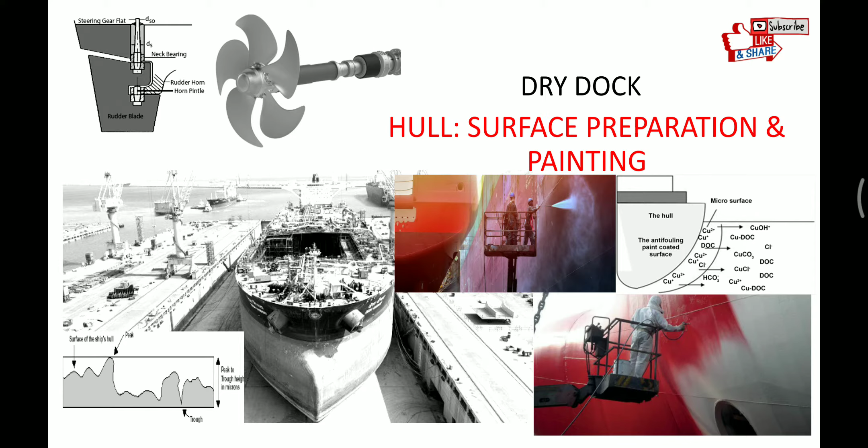So friends, till now we have discussed the whole dry docking process, how the ship is taken to the dock, the work carried out during dry docking, and how we have taken the ship out of dock. Now we will see one of the major jobs done during dry docking, that is surface preparation and hull painting. So let's see the process.

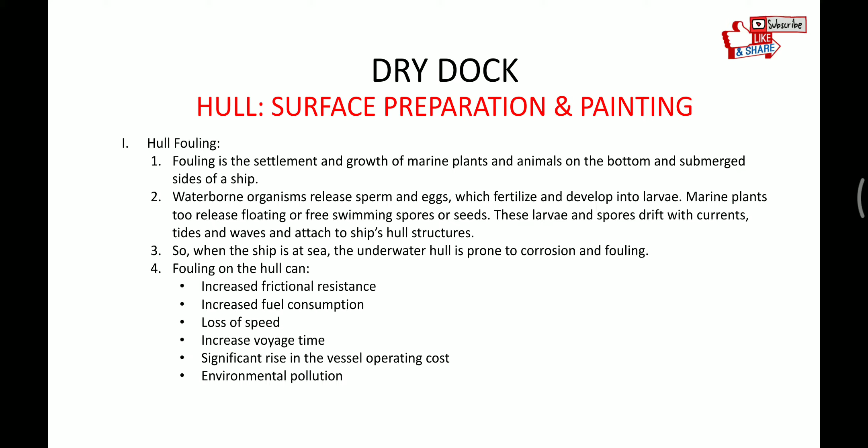When the ship is underwater, the underwater part of the hull gets fouled and corroded, so for that the hull has to be painted. If the hull is fouled, it increases friction resistance, increases fuel consumption, causes loss of speed, increase in voyage timing, significant rise in vessel operating cost, and environmental pollution.

So before the paint is applied, we have to prepare the surface. Surface preparation basically involves cleaning of the surface and drying — cleaning of surface from oil, grease, dirt, and chemicals, since these things prevent adhesion of coating.

Then water soluble materials like sodium chloride, which causes blistering of the paint. Then soluble ferrous salt, which in contact with steel and moisture initiates rusting of the steel. Then loose rust and mill scale. So we have to remove all these things from the surface before paint can be applied. Another important thing is the roughness of the surface should also be taken into consideration before applying paint.

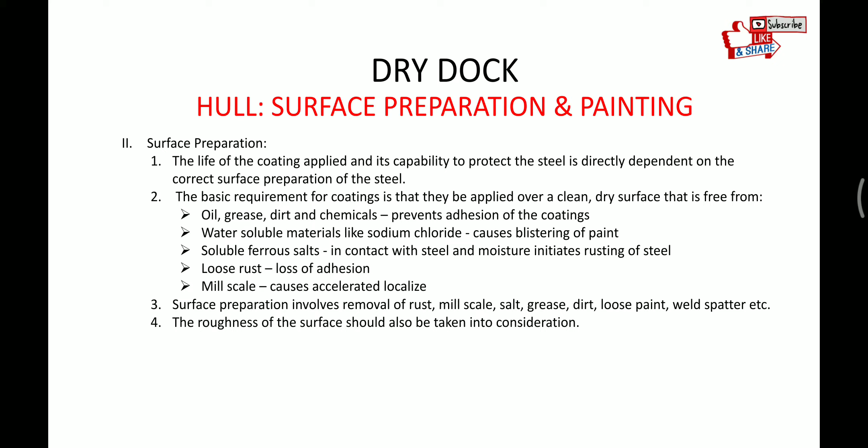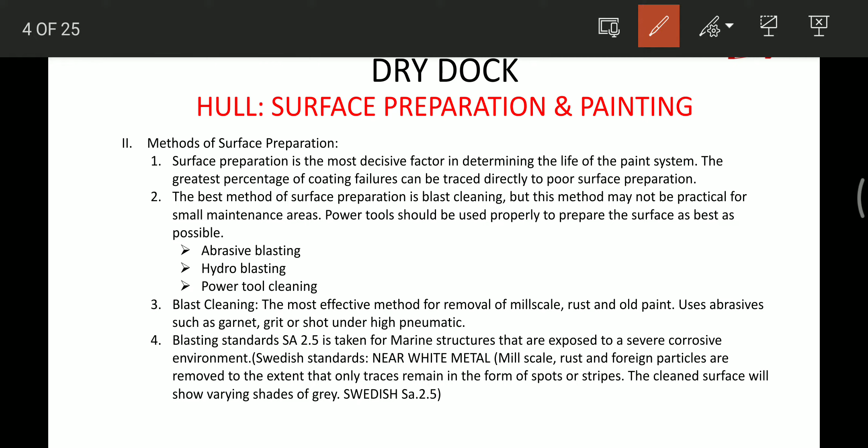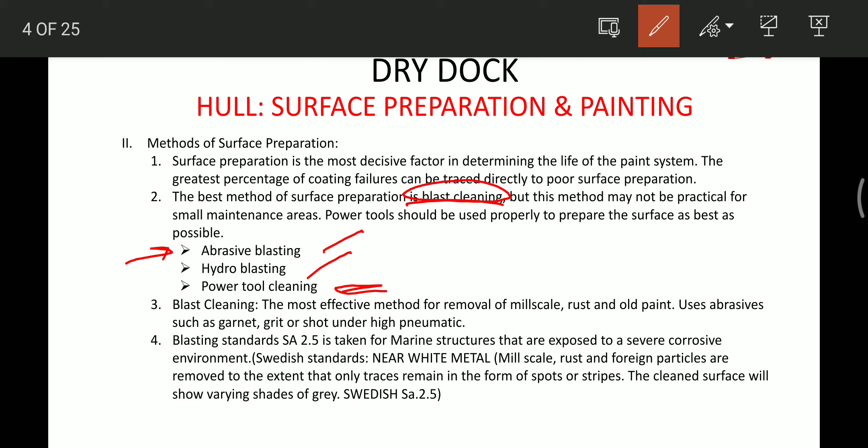So surface preparation can be done by using the blasting technique. Blast cleaning process is used for surface cleaning for large areas, while for smaller areas power tools are used. Surface cleaning by blasting can be of abrasive blasting or hydroblasting — let's see these one by one.

Blasting can be of different types, like sweep blasting, in which only a jet of abrasive is used. Its effectiveness depends on the nature and condition of the surface, the type and particle size of the abrasive, and the skill of the operator.

Whereas abrasive and slurry blasting, which is called wet blasting, uses water and abrasive. The advantage is that the hazards of dust and associated health problems are overcome, and this process can also remove salt.

The third type is hydroblasting or hydrojetting. This technique cleans the surface relying entirely on the energy of water, free of abrasive, striking the surface to achieve the cleaning effect. Here the pressure of water can go up to 25,000 psi, and the size of the nozzle is very important.

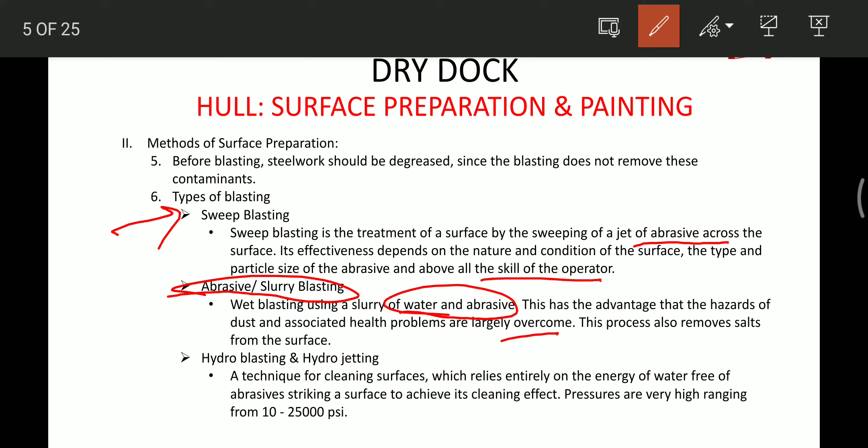For non-ferrous metals, sweep blasting can be used at low pressure.

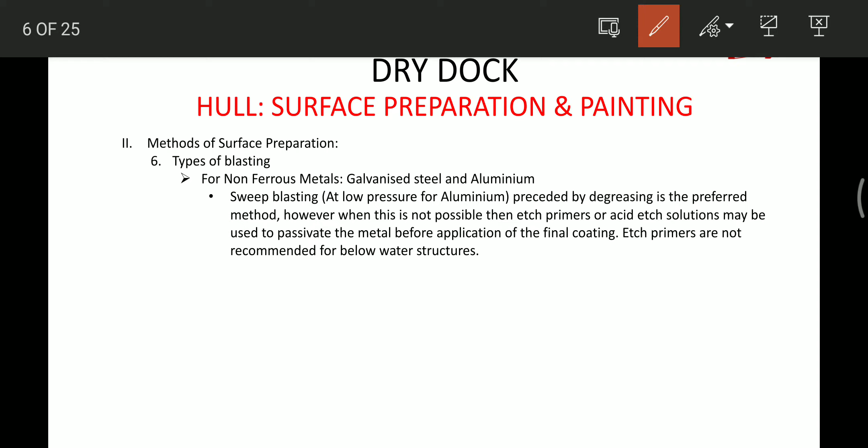Now let's see the paints. Paints basically consist of three major components: the binder, pigment, and solvent. Let's see the properties of these one by one. The binder is the largest component of the paint — it's the compound that has the most influence on the characteristics of the paint, like adhesion, hardness, strength, resistance to chemicals, etc. Paints are generally named after their binder components, like epoxy, alkyd, chlorinated rubber.

According to the drying and curing process, binders can be classified into two types: thermoset and thermoplastic. Thermoset coating, when dried, is chemically different from the paint in the can, whereas thermoplastic coatings show no chemical change. Thermoplastic coatings are solutions of resins and polymers dissolved in suitable solvents.

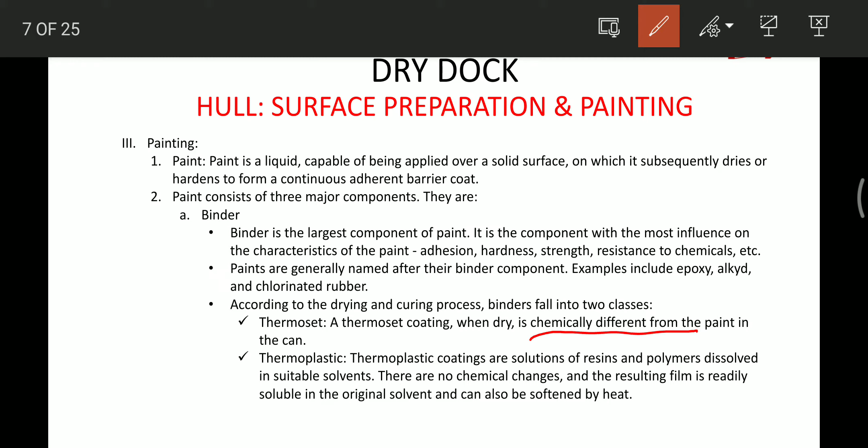Now we'll see what are pigments. Pigments are small particles of solid materials distributed in the paint. Their primary function is to give the paint color, binding capacity, and to protect the binder against degradation from the sun's ultraviolet rays — basically improving the binding capacity of the binders.

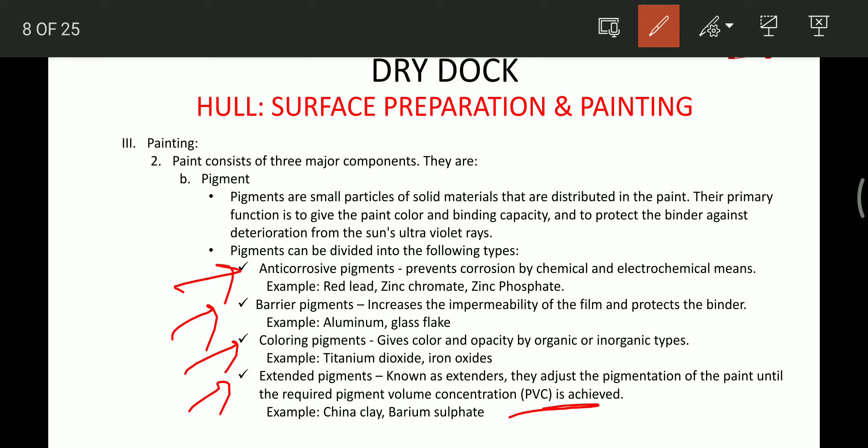Pigments can be divided into the following types: anti-corrosive pigments that prevent corrosion by chemical and electrochemical means; barrier pigments which increase the impermeability of the film and protect the binder; coloring agents which give color; and extended pigments, also known as extenders, which adjust the pigmentation of the paint until the required pigment volume concentration is achieved. These are the properties of the pigment.

Now the solvent, the third part of the paint. Solvent facilitates the application of the paint — it dissolves the binder and reduces the viscosity of the paint to a level suitable for various methods of application, like brush, roller, conventional spray, and airless spray. After application, the solvent evaporates and plays no further role in the final paint.

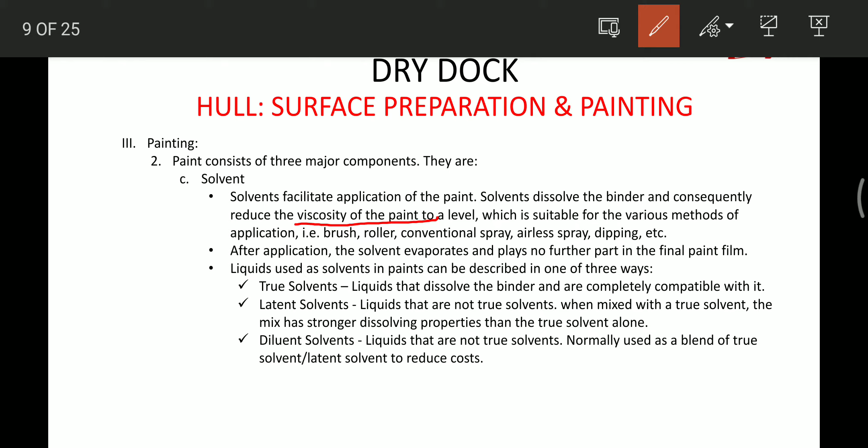These solvents are of true solvent type, latent solvent type, and diluent solvent type. The true solvent is a liquid that dissolves the binder and is completely compatible with it, whereas latent solvents are not true solvents, but when mixed with the true solvent, the mixture has a stronger dissolving property than the true solvent alone.

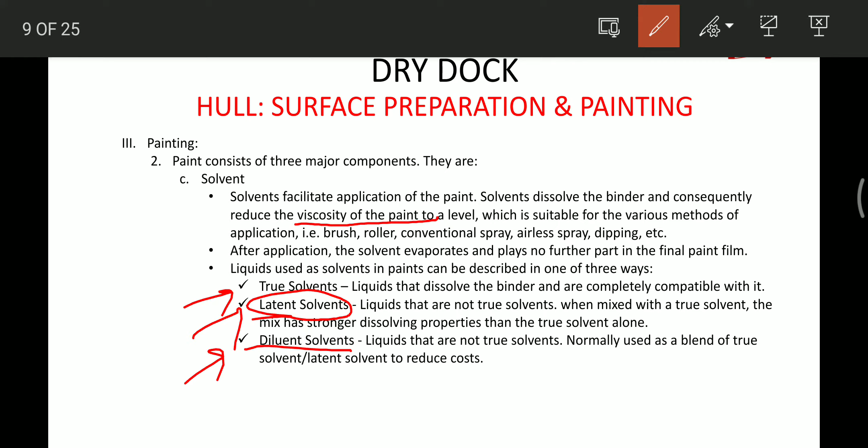Now let's see the types of paints. Paints can be of anti-corrosive type, anti-fouling type, and primers. Let's see them one by one.

Anti-corrosive paints should be corrosion inhibitor and compatible with the cathodic protection system and their by-products, basically ions. The main work of the anti-corrosive coating is to form a barrier between the seawater, which acts as an electrolyte, and the steel plate of the hull, and retard the penetration of water and oxygen with the application of thick coating with very low permeability.

These paints are bitumen, coal tar, epoxy, etc. As we are aware, one of the prime movers of the corrosion triangle is ions. So these anti-corrosive coats basically do not contain any ions. The coatings are necessarily of high build and do not contain any metal or molecules that would interfere with the cathodization of the hull by the cathodic protection system. So basically these paints do not contain any metal or molecule, so that ions are not produced.

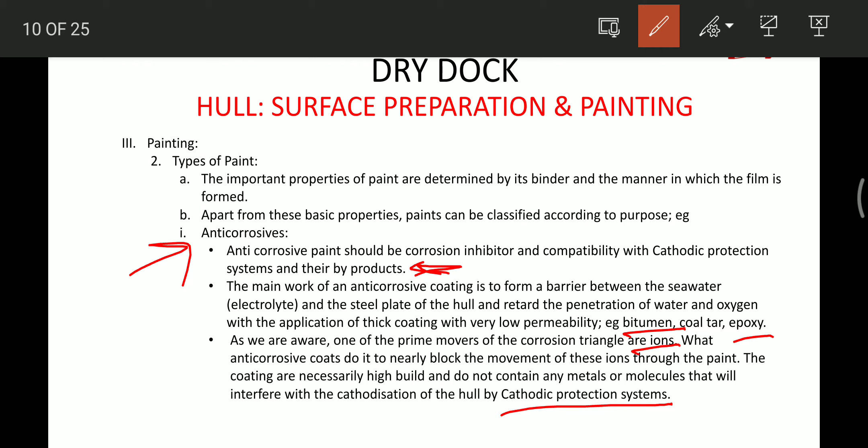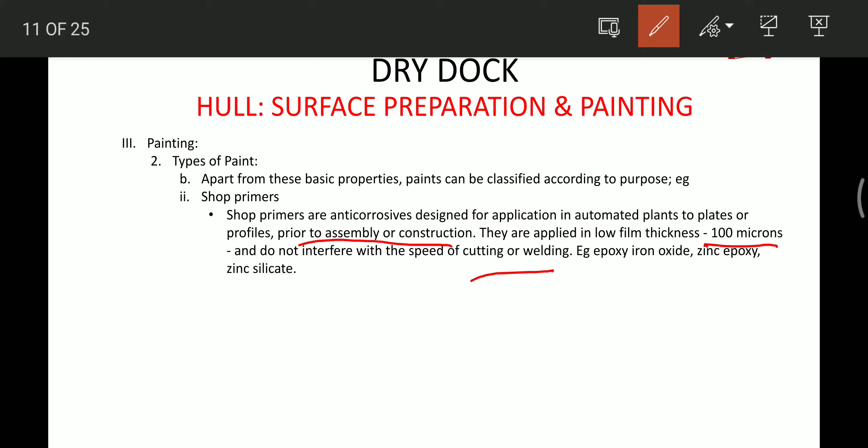The second type of paint is shop primers. These are anti-corrosive and are designed for application in automated plants prior to assembly or construction. This is very important - they are mostly applied in an automated process in the shop prior to assembly and construction. They are applied in low film thickness, that is 100 micron, and they do not interfere with the speed of cutting or welding. Examples are epoxy, iron oxide, and zinc silicate.

Now the third type of paint are the antifoulants. Antifoulants have been the primary method of protecting ships from fouling. They prevent growth penetration through the coating and extend the corrosion protection of the hull. In the simplest form, antifoulants are comprised of binder, pigment, and solvents like any other paints.

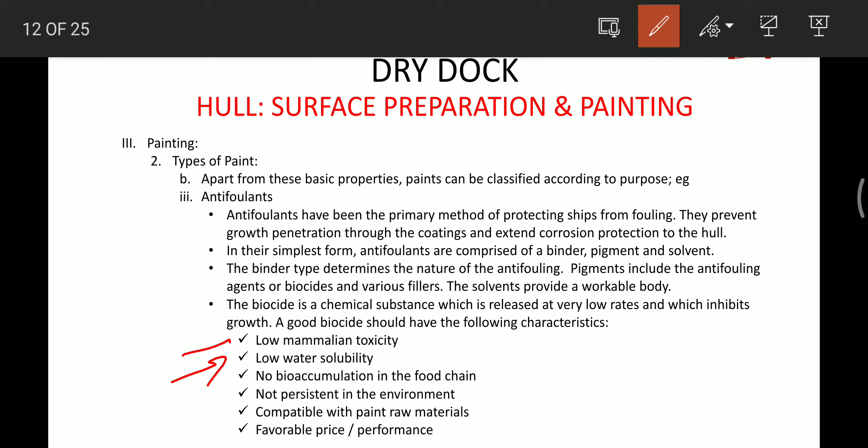The binder type determines the nature of the anti-fouling. Pigment includes the anti-fouling agents or biocides and various fillers, and solvents provide the workable body. The biocide are chemicals which are released at a very low rate and which inhibit microbial growth. A good biocide should have the following characteristics: low mammalian toxicity, low water solubility, no bioaccumulation in the food chain, not persistent in the environment, compatible with the paint raw material, and favorable price as compared to performance.

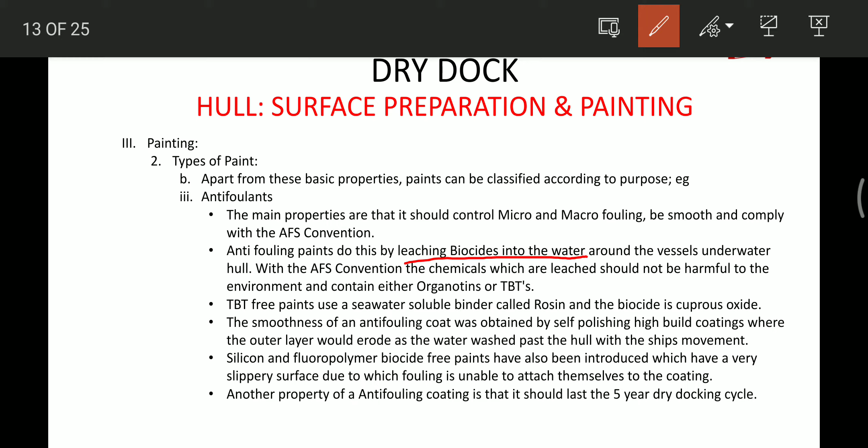The main properties are that it should control micro and macro fouling and be smooth and comply with the AFS convention. Anti-fouling paints do this by leaching biocide into the water. So this is one way they work - by leaching biocide into the water around the vessel's underwater hull.

With the anti-fouling system, or AFS convention, the chemicals which are leached should not be harmful to the environment and should not contain TBTs. TBT-free paints use seawater soluble binders called rosins, and the biocide used now is cuprous oxide.

Smoothness of the anti-fouling coats was obtained by self-polishing high build coating - this is the second way these paints work. In self-polishing high build coating, the outer layer erodes as the water washes past the hull with the ship's movement. Third is silicone or fluoropolymer biocide-free paints. These paints are biocide-free and have been introduced with a very slippery surface, due to which fouling is unable to attach itself to the coating.

So these are the three ways of action of anti-fouling paints, and accordingly they are classified too. The most important property of these paints is that they should last for at least a 5 year dry dock cycle, because if not, the frequency of dry docking will increase, and the cost of operation will also increase.

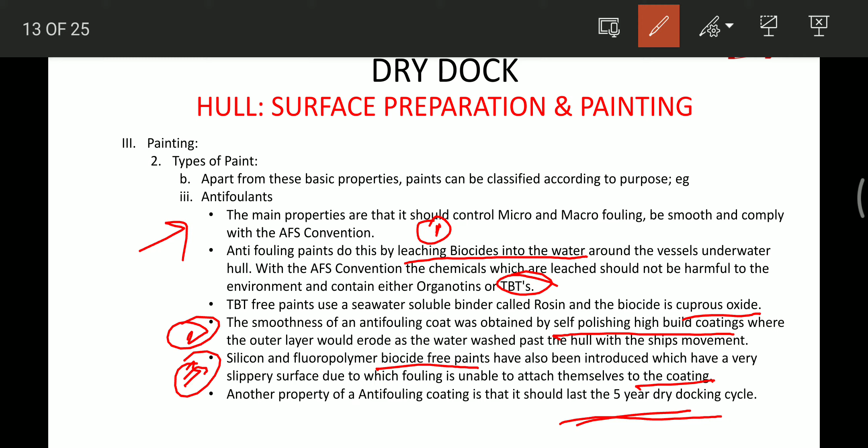So as we have seen the action of these paints, accordingly the paints are divided into two categories: the biocidal route, which uses copper and boosting biocides, and the non-biocidal route, where the working is totally based on a smooth surface that does not allow microorganisms to adhere to the hull surface.

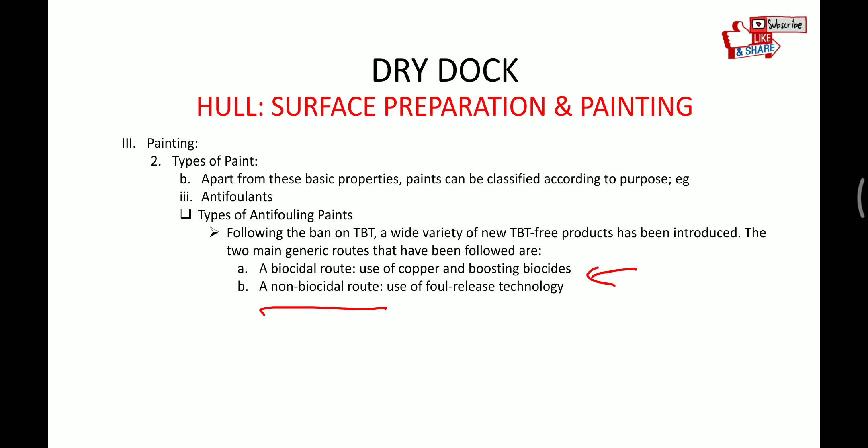Now let's see the conditions during application. During application, when paint is applied, the relative humidity of the air, temperature, and the surface temperature can individually and collectively influence the quality of the final coat.

Painting a steel surface that has water vapor condensing on it will lead to premature coating failure due to a corrosion cell formed by the steel, water, and trapped air underneath the coating. In order to determine whether or not the surface is wet, steel temperature should be measured using surface temperature thermometers, and dew point calculated after measuring the humidity. So paint application should not take place where the steel temperature is less than the dew point.

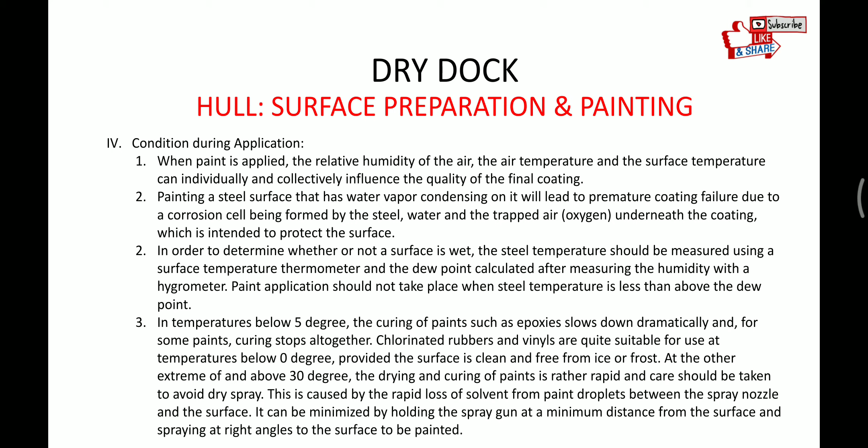So friends, this is very important. This should be less than, below dew point.

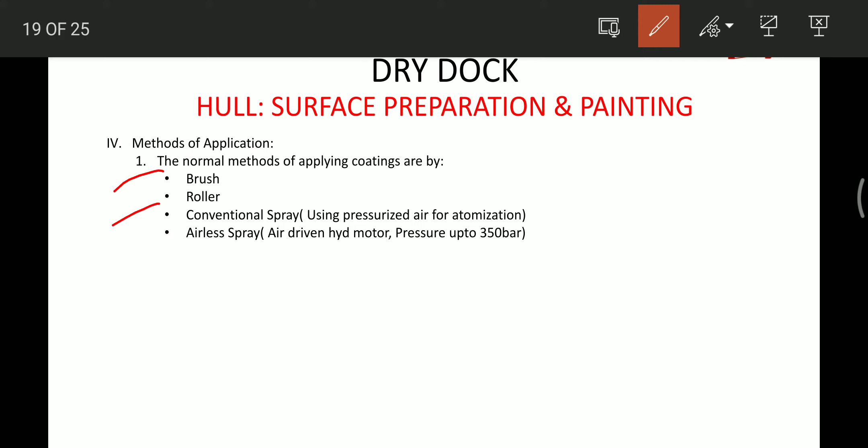Now the paints can be applied by using brush, rollers, conventional spray where pressurized air is used for atomization, and airless spray where air-driven hydraulic motors are used, and they can produce pressure up to 350 bars. So these are the four ways by which the paint can be applied.

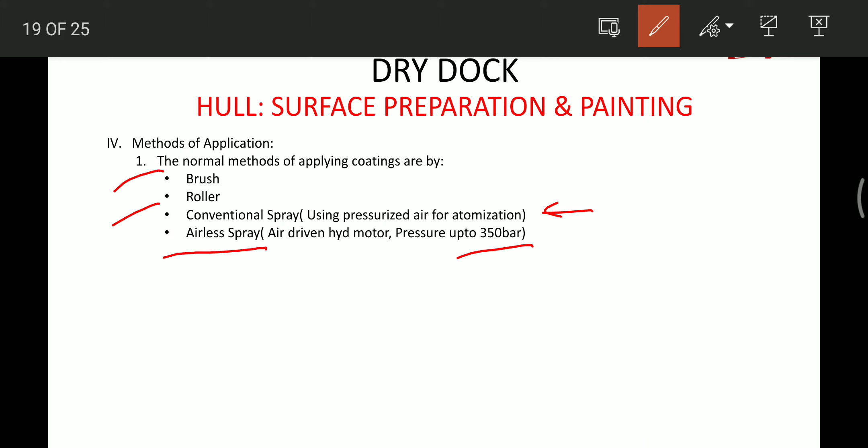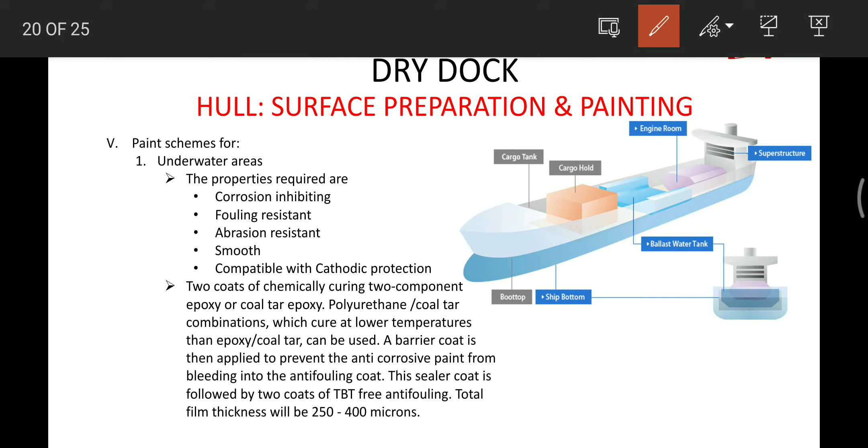Now let's see the paint scheme. The different types of paints are applied on the ship depending upon the application or the requirements. So for underwater area, the paint should have property of corrosion inhibition, fouling resistance, abrasion resistance, smooth and compatible with the cathodic protection. These properties should be there for the paint which is applied on underwater areas.

So let's see what all paints are applied and coatings. Two coats of chemically curing two component epoxy or coal tar epoxy is applied. Then polyurethane or coal tar combinations which cures at low temperature, than epoxy coal tar can be used.

After this, a barrier coat is then applied to prevent the anti-corrosion paints from bleeding into the anti-fouling paints. So basically, both anti-corrosion and anti-fouling paints are applied. First, the anti-corrosive paint, epoxy or coal tar epoxy, or polyurethane or coal tar combination which cures at low temperature, is applied. Then after that, a barrier coat is applied to prevent the anti-corrosive paints from bleeding into the anti-fouling coat. Then after this, the anti-fouling paints are applied.

That is, the sealer coat is followed by 2 coats of TBT free anti-fouling paints, and the total film thickness should be about 250 to 400 microns. So this is how we paint the underwater hull area.

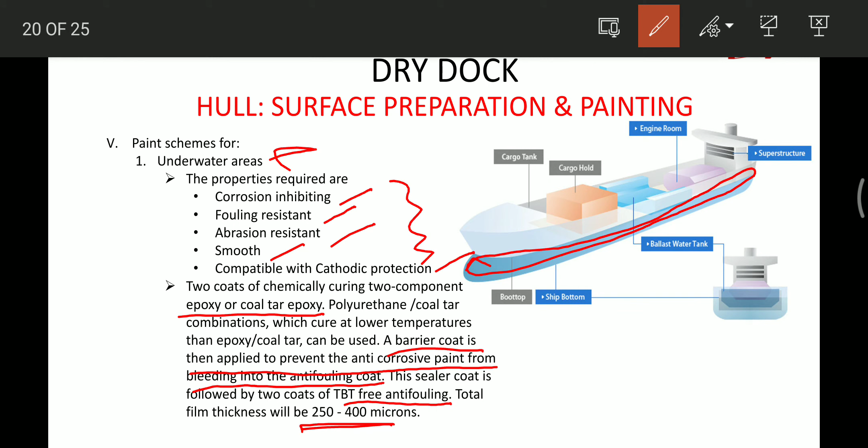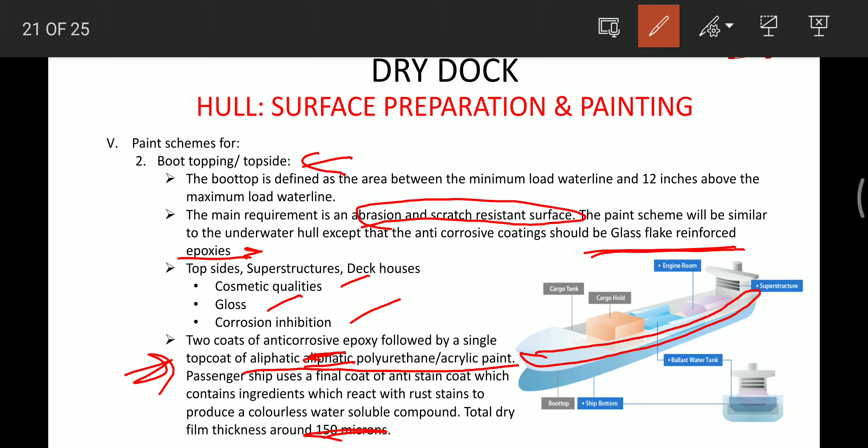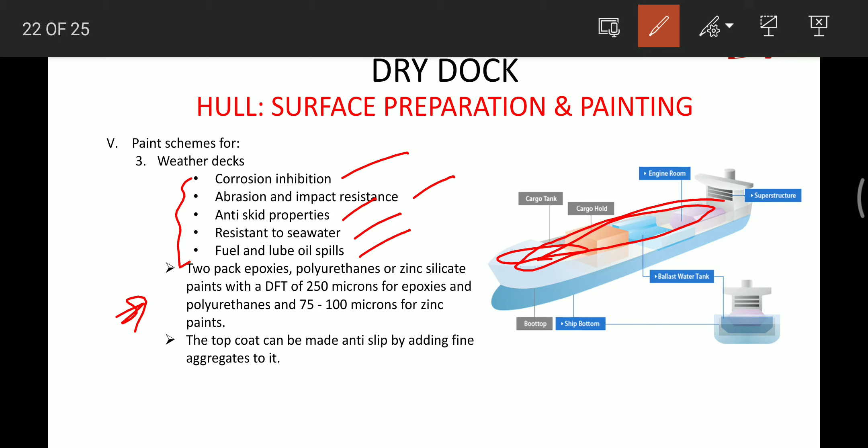So the coating which is applied is 2-pack epoxy polyurethane or zinc silicate paint with dry film thickness of 250 microns for epoxies, and 75 to 100 microns for zinc paints. The top coat can be made anti-slip by adding fine aggregates to it.